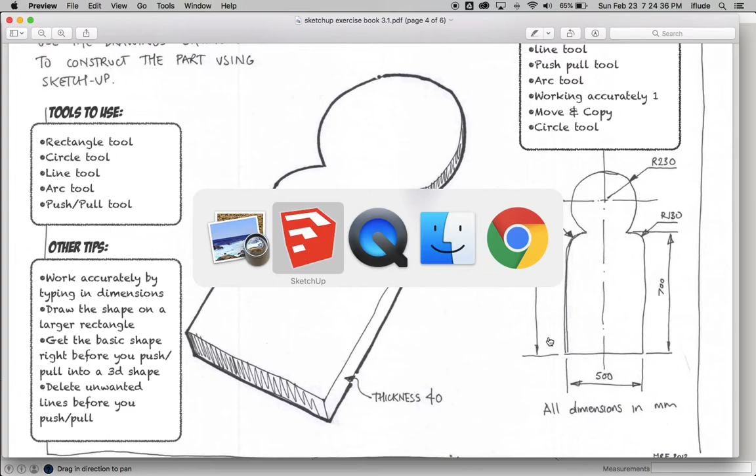those guidelines. So I'm going to actually start off though with a rectangle of 700. Then I'm going to start with a circle of 900 just to make sure that those shapes overlap correctly. So I'm going to start off by drawing a rectangle 500 by 700. Starting at the origin, drag out 500, 700, and that is that.

Now what I'm going to do is take my tape measure tool, and I need to drag a line, a guideline, and I'm going to put it exactly in the center. Now the way I do that is to move up here and move along this line until it tells me, you can see there that it's at 250. I know my width is 500, so I know that that's the midpoint. Okay, so now if I leave my guideline there, I now have a guide to exactly where the center point

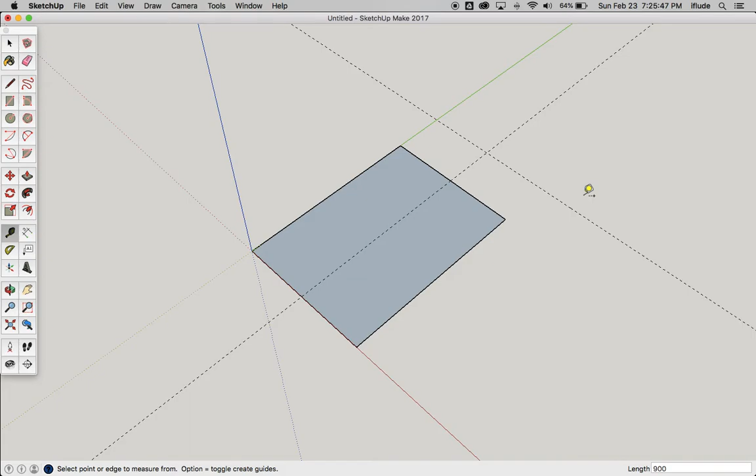of this is. Now, if I go back to my sketch, I also need a perpendicular guideline to that one that I just drew, 900 up from the bottom of the shape. So let's do that. Here's my guideline. I think that's somewhere like 900, but I'm going to type just to make it accurate. And because that is there and the sketch shows that it's there, I know that I'm roughly correct.

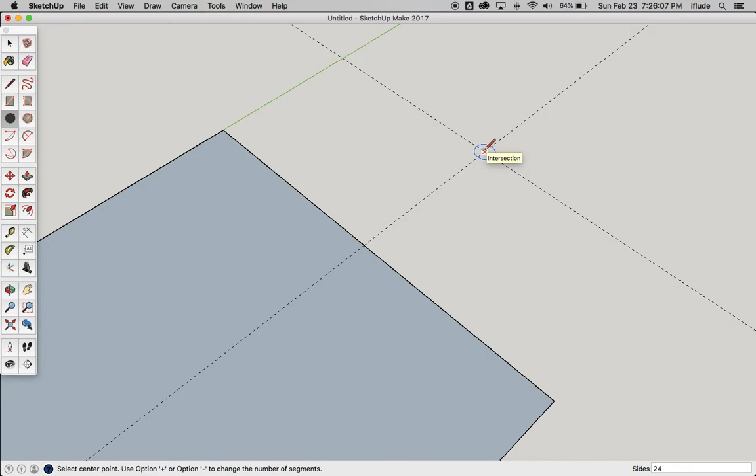And finally what I'm going to do is put in that radius circle of 230. So 230, click on here, make sure that I'm on that intersection that I just defined. Type my radius of 230, and you can see there that we have those two overlapping shapes, and that confirms that that's kind of what the shape does. So I think I'm kind of on the right track here.

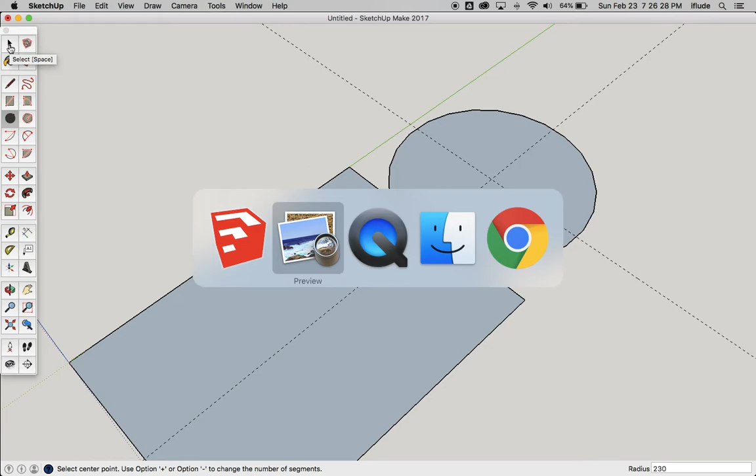Right, before I go any further, I'm now going to just put these little rounded shoulders, each of 130, on my shape. And for that, of course, I'm going to use the 2-point arc again. Click on one edge, go down until it turns pink, move until it's pink, type my radius, 130, and there it is. And now I know I'm correct.

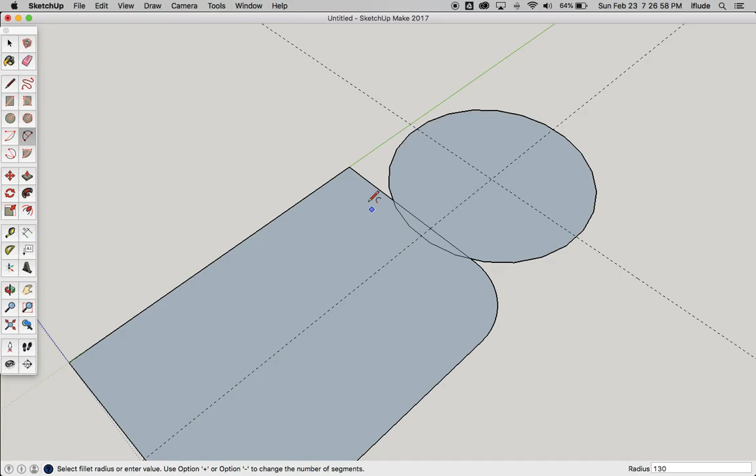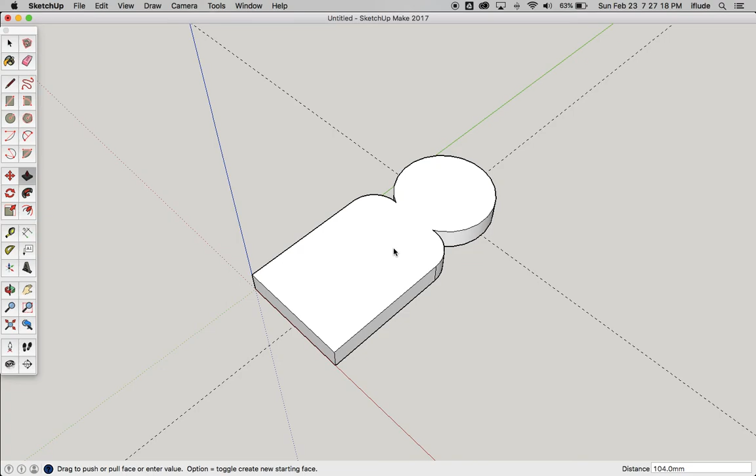So over here, same radius, get near the corner but not on the line, double click, and now I have my little shoulders. So get rid of that line, get rid of that line, and all I need then to do is push pull up to the correct thickness, which again is 40. Type, done. And that is exercise number 3, done as accurately as it can.